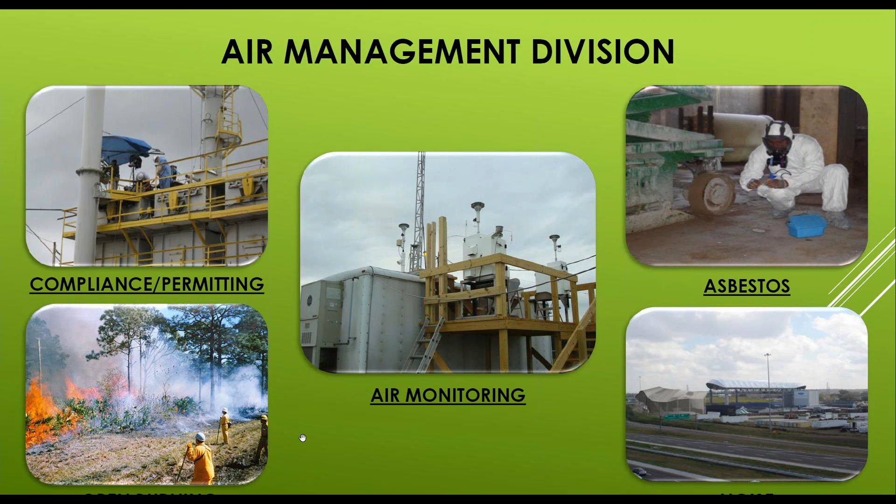So as most people might imagine, to answer the question, why should air pollution be controlled? There's an obvious and well-documented connection between air quality and human health. Respiration is the basic function for humans and animals, and it's directly affected by some of these pollutants. The respiratory system is the biggest area affected, due to everything from simple coughing and wheezing to asthma, narrowing of the airways, and bronchitis. Even the cardiovascular system can be affected, adding strain to the heart, coronary disease, and so forth.

And the other item I mentioned is vegetation, the potential to damage agriculture and vegetation. High levels of ozone have been shown to reduce crop yields, can impair reproduction of the plants, and so forth. So it's one of those things that's best thought about, and it's something we need to be in constant concern with.

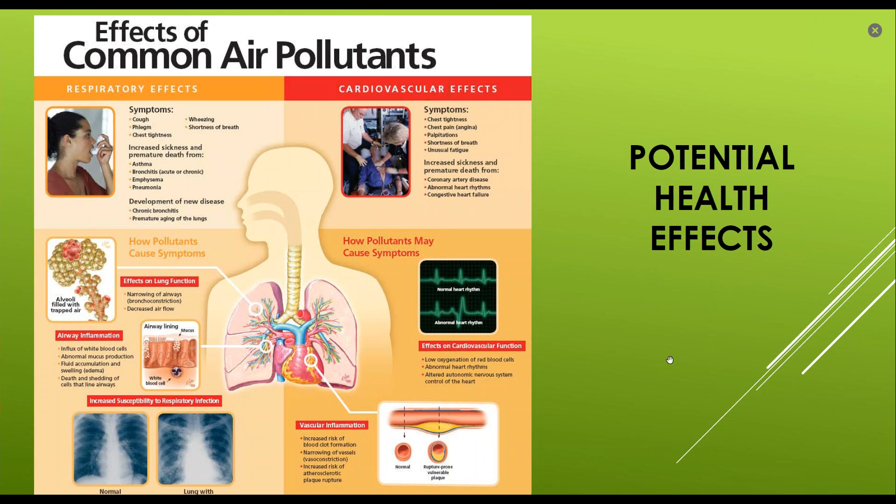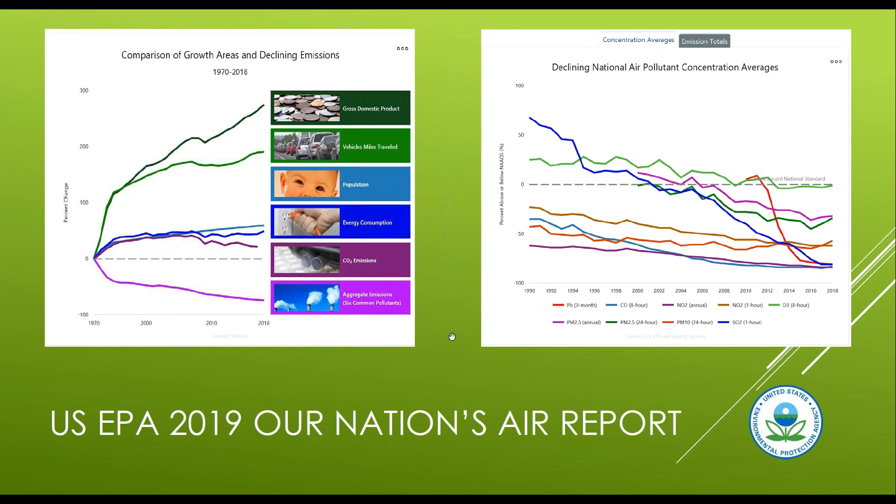So the map on the left shows our monitoring network, which is a series of 11... I'm sorry, I think I got lost.

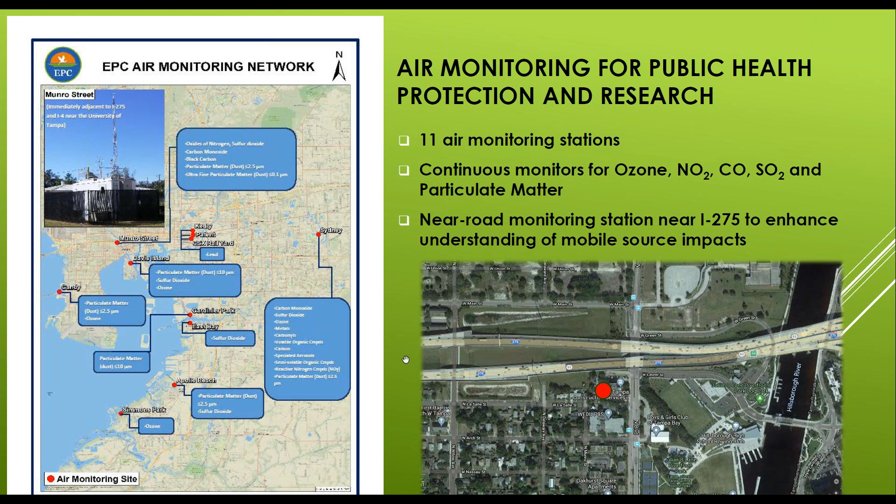So one additive with this slide is to talk about the COVID-19 activities going on and whether the isolation and sheltering - we know it's significantly reduced traffic - is the air quality better? Well, intuitively, there's less vehicle emissions, so there's less pollution released to the atmosphere. We would expect to see a number.

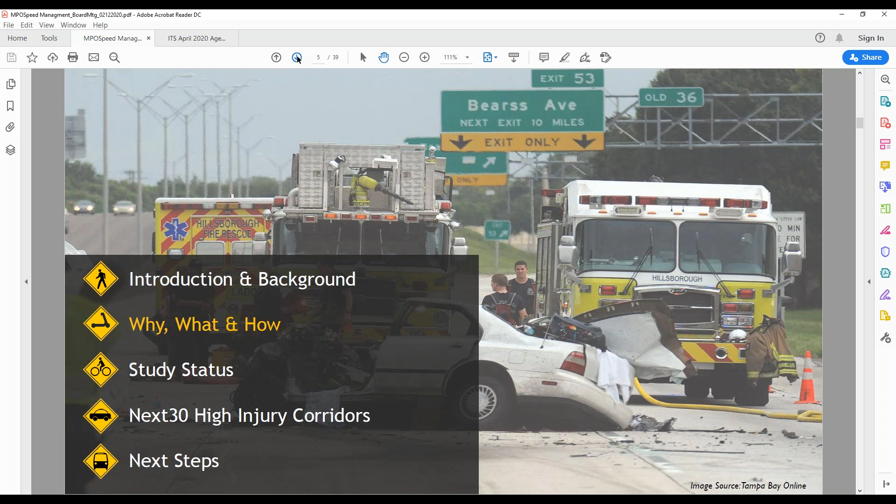And why is this important? I don't think I have to tell any of you on this committee that Florida is the most dangerous state for pedestrians and bicycles in recent history throughout the nation, and we have a lot of work to do. We have a lot of fatalities and a lot of serious injuries that we know we can prevent. So this is a step forward in that movement. Next slide.

In Hillsborough, for some of you that may not know the stats, on average, one person is dying on Hillsborough streets every other day. We see it in the reports every day on TV, in the newspaper, on social media, and we become complacent to this. So I want to urge some urgency in trying to minimize some of the crashes that are occurring on our system.

As part of the Vision Zero Action Plan, there was a lot of data pulled together in determining the top corridors. Of the fatal crashes reported and reviewed back in 2017, 75% occur on roads with posted speeds of 40 miles an hour or higher. And 75% of all these fatal and serious crashes occur on only a third of our roads. 33% of all of them were involving aggressive driving and so forth.

So where do we go from here? The data is telling us and pointing us in the right direction, and that's the objective of the study.

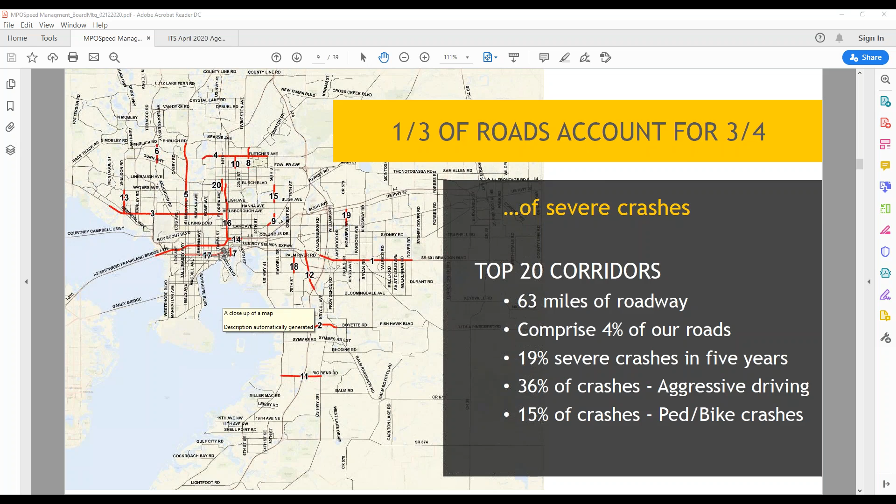One of the principles about safety is managing speed, because the theory is that if you manage speed, the risk to all travelers will significantly reduce, including especially the severe injuries and fatal crashes. Speeding right now kills more than 10,000 people per year nationally. It's right on par with drunk driving, however it doesn't have the same social consequences that drunk driving has.

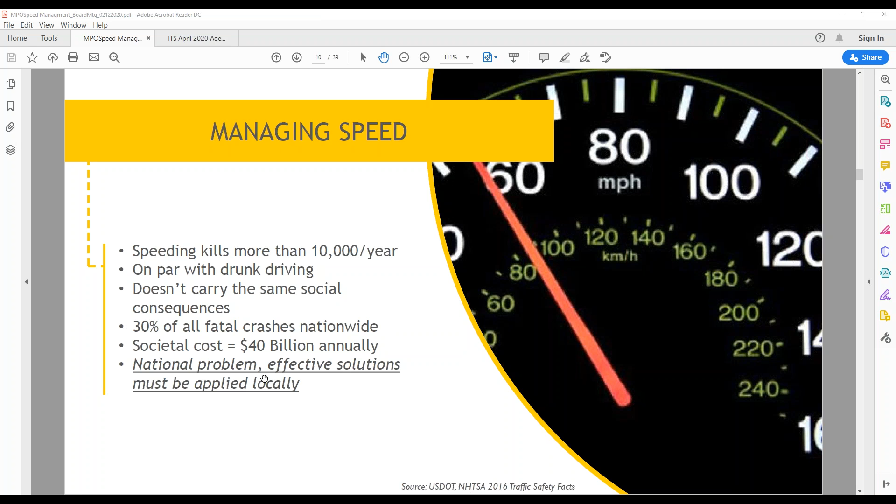Speeding accounts for 30% of all fatal crashes nationwide. It has high society costs, $40 billion annually, and it's a national problem being discussed all over the country today. I rest assured that everybody is dealing with this, everybody's facing it, but effective solutions must be applied locally with our organizations right here in our community.

We talk about speed. This is one slide that I want - if you take anything away from this presentation, take this one away: speed must take the back seat. Think about it from this perspective: if a pedestrian or a cyclist is walking and is hit by a vehicle traveling at 20 miles an hour, their chances of survival is pretty high - close to 80% survival rate.

However, that same person or bicyclist, being hit by a car at 40 miles an hour, their chances of survival is relatively low - just barely over 20%. So speed does matter. Trying to control speed and manage the speed at which our vehicles are traveling on our network will clearly increase the survivability of crashes when they do happen.

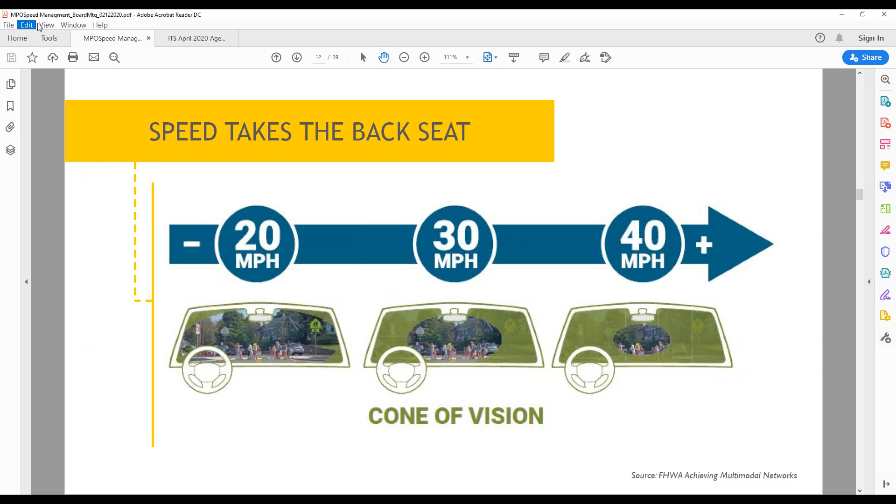The premise behind that is your cone of vision. At 20 miles an hour, for example, when you're driving, you can see people on the side of the road, on the sidewalks. If somebody darts in the middle of traffic crossing, or you weren't paying attention, you can react really quickly. But at 40 miles an hour when you're driving, your cone of vision is much more limited - you can't see what's on the street. You're moving so much faster, so your reaction time is much greater. That has a significant impact on how people react, but also the severity of the collision when it does occur.

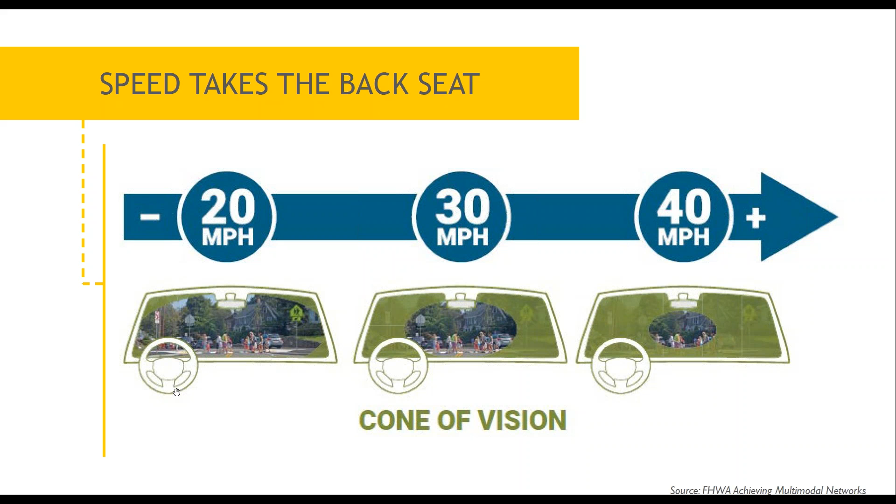The study objectives - there is one primary goal: improve public health and safety by reducing road fatalities and serious injuries. We're not looking to resolve all crashes - that's not what Vision Zero is all about. It's at least reducing the severity of the crashes that do exist.

The study has several outcomes, and I'll just highlight these real quickly. We want to improve safety experience for all users. We want to increase awareness of the dangers of speeding and aggressive driving in our community. We want to institutionalize good practices. We have learned through this process that we're already effectively using a lot of great speed management techniques in some of our corridors, but we got to make sure that we look at this holistically from every level of government - from the state level to the county level to the city level. One of the other outcomes will be to identify supportive policies, programs, and infrastructure, and of course have cooperation and support from all the stakeholders in our community.

So the Speed Management Action Plan - the study scope had 4 tasks. I'm going to go through these really quickly.

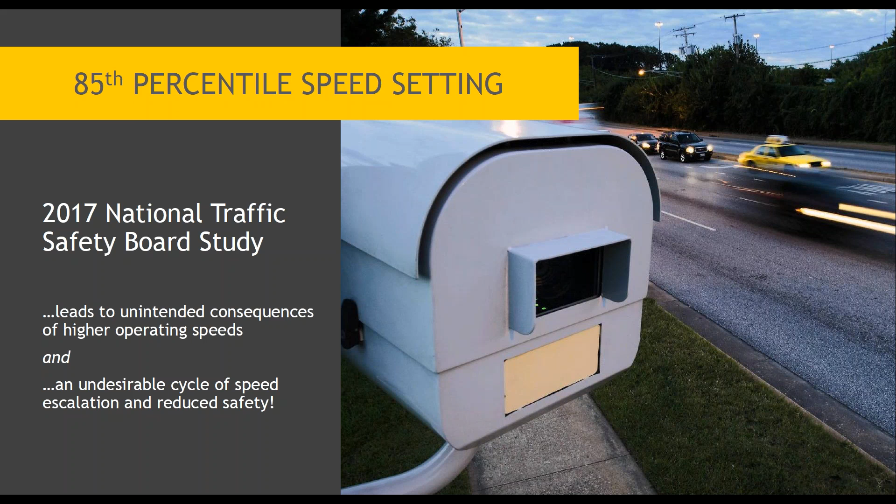So you may be asking, how many other methods of setting speeds do we have? Actually there are at least 3 right now. 85th has always been the one that most of us have used throughout the nation and in various communities. But US Limits 2, which the US DOT has put together, is also available, and I wish more communities would start using it. It's based more on setting speed limits closer to the median or the 50th percentile speed. And then, of course, through Vision Zero and Safe Systems approach, there's target speed. We'll talk about this in a second.

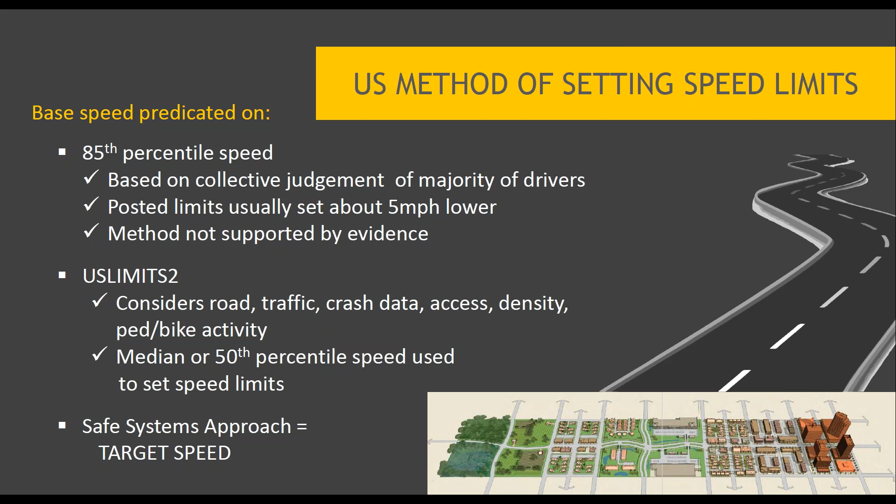So one of the first steps we did, we were curious how the speed limits on the top 20 high injury corridors in Hillsborough County compare to national best practices. This table, I know it's a lot of information there, but we looked at all the top 20 corridors. We looked at its classification. We looked at its context classification. We compared then the posted speed limits for all of these corridors, which range - some of them are rather lengthy and they range in speed limits - to the ITE CNU class speed range.

And this is a publication that came out back in 2010, almost 10 years ago, that ITE and CNU had put together, called Designing Walkable Urban Thoroughfares, a Context-Sensitive Approach. It is an ITE recommended practice, and it has clearly identified max speeds or a range of speeds for every class.

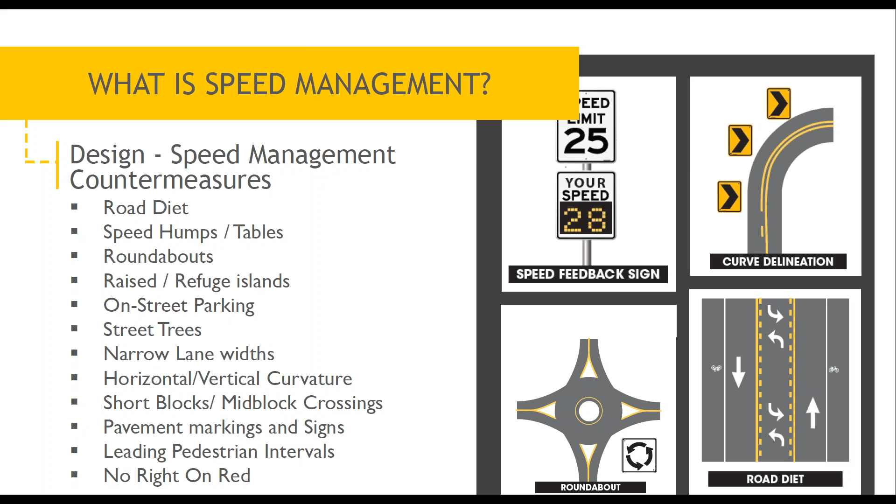There's also ITS applications that can be used and have been used across the nation at other locations. We've seen driver feedback signs on quite a few of our corridors in Hillsborough County, and those are effective and should continue to be installed.

There are signals we need to think about, decreasing the block size or the distance between controlled intersections, for example installing more signals to maintain an orderly progression along a corridor. I know we have access management guidelines here, and some of these arterials have controlled intersections 2 miles apart. The more signals we have, the easier it is for us to come up with a better, orderly progression to target a speed.

There are other applications, like rest-in-red signals, where excessive speeds trigger a red signal indication. I have not seen that one in person, but communities are out there trying it, where you have a corridor multiple miles long - if you can detect speeding at one end, you can then slow down or change the signals as drivers progress through the system.

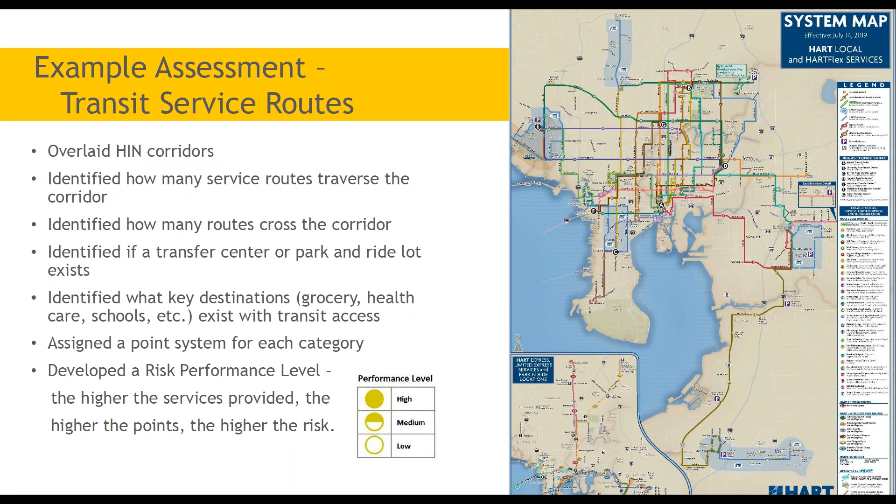So here's the total matrix that we developed for the top 20 corridors. They're listed in the order if you were to only look at crash severity per mile. We then looked at crash severity per mile, ped bike crash rate per mile, how many schools per mile on each corridor, and the equity coverage. We looked at posted speed, the context class conflict mentioned earlier, transit routes, and high volumes. We gave them a rating, weighted them together, and determined a priority scoring: high, medium, and low. What we found was that there are a lot of changes in priorities.

For example, one of the highest priority corridors is Hillsborough Avenue between Longboat Boulevard and Florida. Another is Florida Avenue, Waters to Linebaugh. Another is Bruce B. Downs, Brandon Boulevard, and Fletcher. These are the high priority corridors that, when you looked at all these metrics, flowed right to the top to be addressed first.

I know that some of the corridors listed in the top 20 are already under evaluation and have been worked on by the various agencies, and we continue to look forward to seeing significant reductions in crashes and fatalities as we move forward.

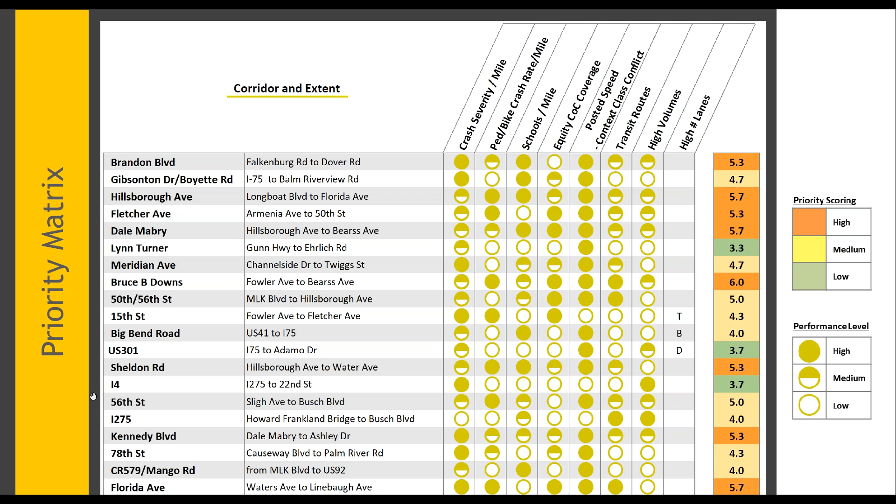One of the last tasks was that the county said, well, we're working on some of these corridors, what's next? What is the next top 30 high injury corridors in Hillsborough County? And can we prioritize them just like we did the top 20?

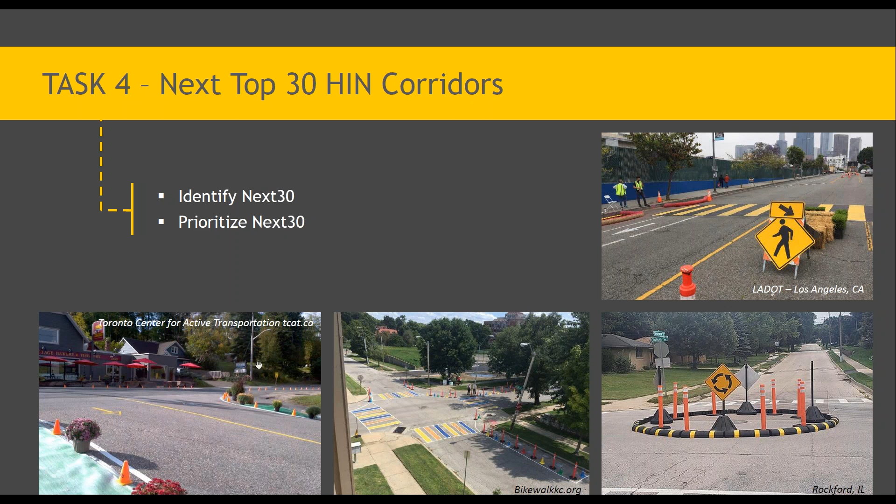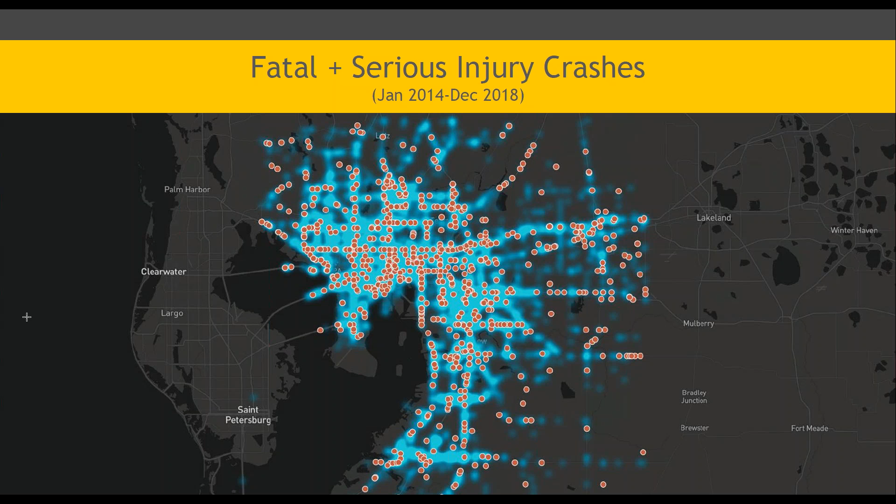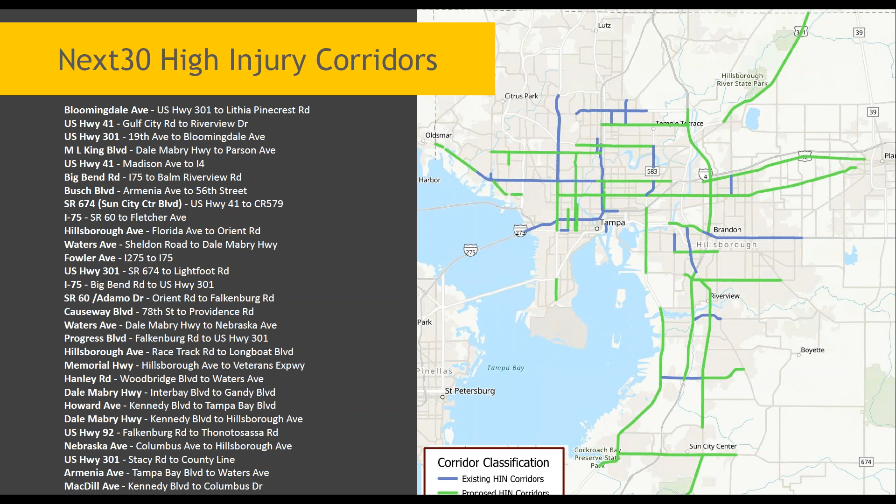We did the same thing for the next 30, looking at a smaller number of factors: crash severity, schools per mile, equity, posted speed, and high volumes. We identified five additional corridors that should be high priority and moved to the top of the list, including Fowler Avenue, Waters from Sheldon to Dale Mabry. That one popped out pretty high.

Busch Boulevard, US 301, and Bloomingdale Avenue in Brandon. Those were the additional top 5 that really surfaced when we used that same metric to evaluate and prioritize.

Next steps: we're currently putting together a clear articulation of the problem identification based on what we found, coming up with strategies and countermeasures based on research for national best practices and some local applications. We'll come back with plan actions and implementation strategies within the next month. We have one more final stakeholder meeting scheduled later this month on the 27th, and based on their feedback, we hope to finalize the plan and share it with everybody sometime in early May, possibly.

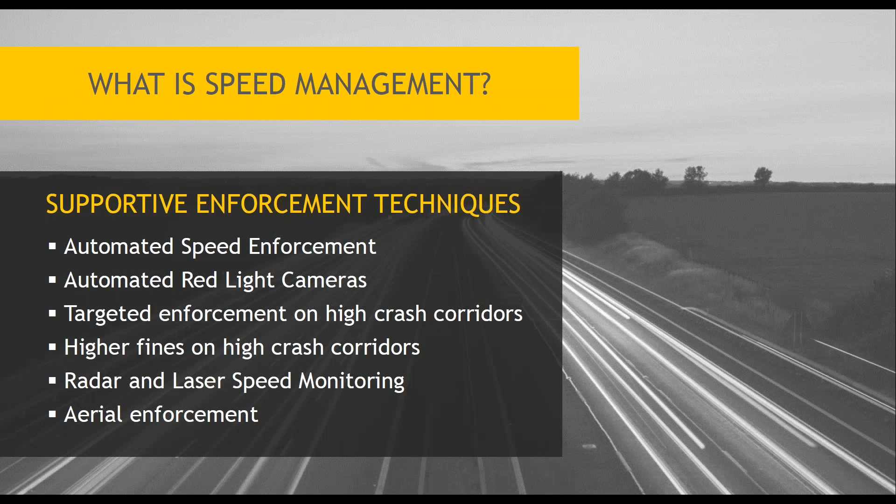Do you have any information you could share with us, or even just with me as a manager of the signal system, on who has used that and what their strategy is, or what the technical details are, who I could talk to about that? Sure. I'm not really an in-the-weeds type of person, but I got that from the FHWA speed management manual.

I could take a look at that and refer you to the specifics. I'm sure if I go back to that document, since I did that research a while back, we can find some communities you could reach out to, or some of their experiences with that technology. It would be really cool to see how effective that was, what the lessons learned are, and whether it's something we can consider from a TSMO and ITS perspective on some of our long corridors.

Sure. Especially thinking about off-peak, off-hours, you hear on some corridors motorcycles racing late at night when there's significantly less traffic. In full disclosure, I've been asked about that strategy along Bayshore. With the recent double fatality over the weekend, certain speed-related crashes really capture the attention of the community in ways that other similar crashes in different locations don't. We want to see what opportunities we've got to enable better best practices as a result of community feedback and a heightened sense of concern.